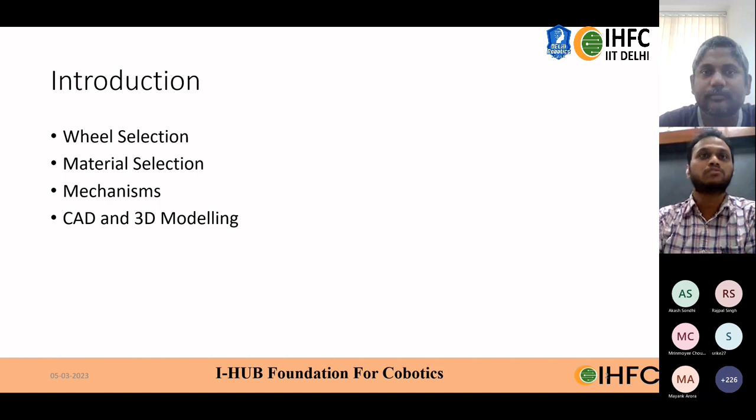Some of you students who have already gone through the taster courses in robotics and automation have some brief idea, and others also I hope have some basic idea. We'll just be elaborating on this.

Coming to wheels, these are the most important parts of your robot. As you know from the video Dr. Venkat shared, you see the bots moving around, and this is where most of your robot control comes into play - how it moves, how you stop the robot, and how you move it to your desired place.

So we'll see some different types of wheels commonly used in robotics - four different types. The first one, on the left hand side, is a standard wheel. This moves in a fixed direction, and you can connect this to your motors - it only moves in a single direction of the motor which you are driving the robot.

The second one is a caster wheel. Again, this cannot be driven - you cannot fix this to your motor, but it's just a support. If you've observed some swivel chairs, you have these kind of wheels which rotate in any direction. So this is just a support wheel to orient your robot.

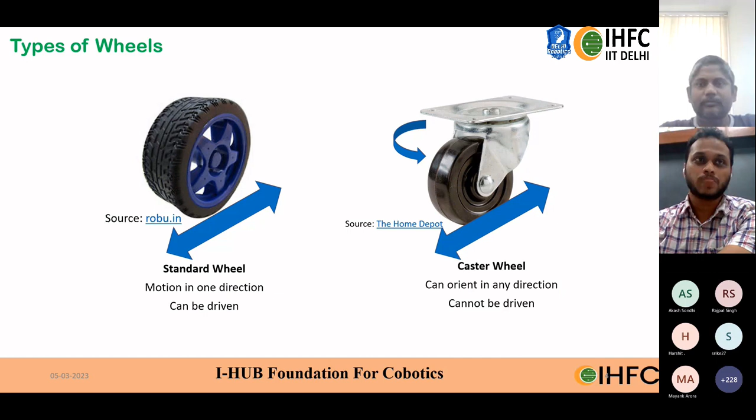Next, we have multi-directional wheels you can use in your robot. On the left, this is an omni wheel - it has a primary direction of motion, and perpendicular rollers attached to these wheels, meaning it can support motion in both directions. You can use multiple omni wheels to move your robot around without needing steering. Similar to omni, we have a mecanum wheel where these rollers are oriented in different directions - again multi-directional rollers - and you can use these wheels to move your robot around smoothly.

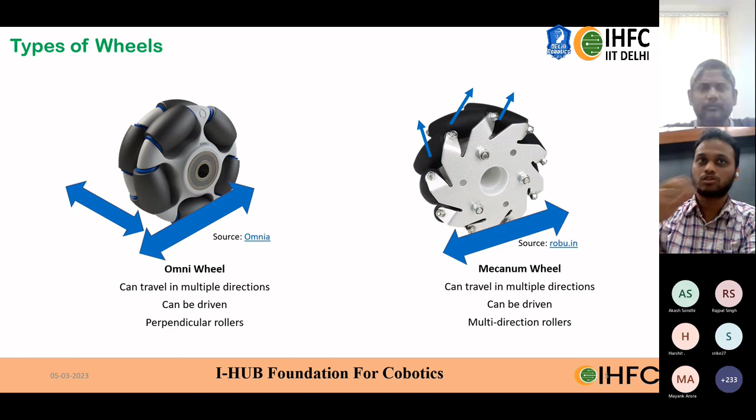I'll just show some videos of how these work. This is the first one - on the left hand side, you can see it has two standard wheels and a caster attached. Just by varying the speeds of the wheels in these two motors, you can rotate your robot anywhere. Whereas in this case, with omni wheels, it can move in any direction based on the input to your motors. All three wheels here are driven. So in the form as well, you have this drivetrain option where you can choose how many wheels you have and how many of them are powered - that you'll have to explain.

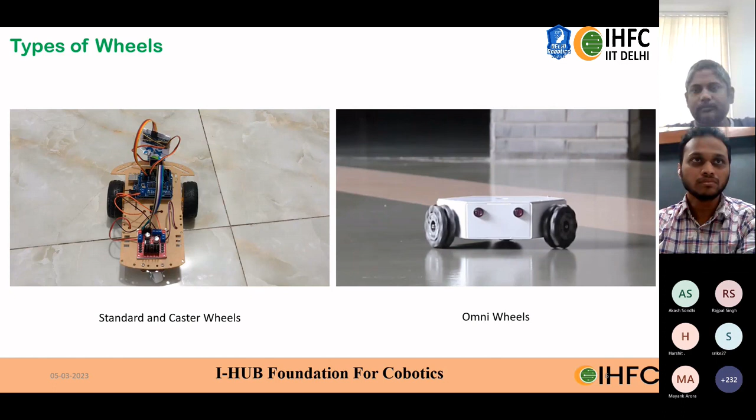Coming to the next slide, this is again a video of a mecanum wheel similar to omni wheel, but this is more smooth. You can see this is driven on all four wheels, and it can rotate and turn in any direction based on the input of your motors.

So this was about different wheels that you can use to build your robot, and on that you and your teammates along...

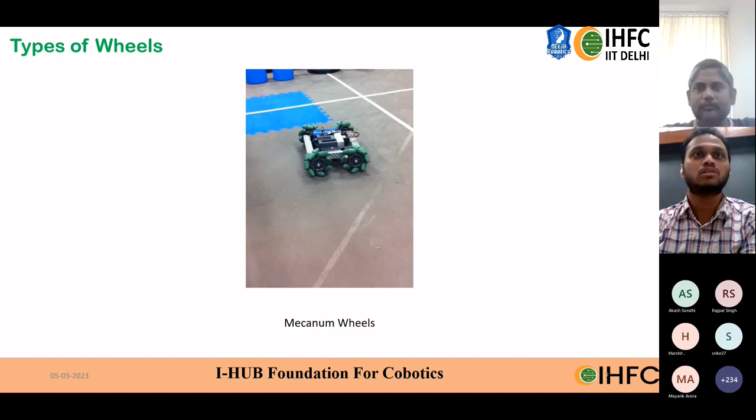You and your teammates, along with your mentor, can decide on different wheels that can be used.

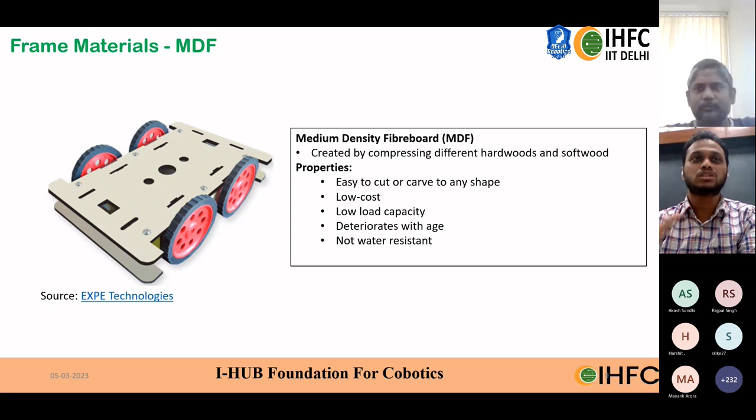Coming to the second topic, there are different materials, and this is also important on how you build your robots and what kind of materials you're planning to use. The first is basic MDF board. You must have seen this for basic robots, like when you're planning to build initial prototypes. It's simple and cheap, and you can easily laser cut these parts based on your requirement and test out your prototypes. This material is recommended for initial prototyping when you're in the testing phase of your robot concepts, to determine the form, shape, and size of your robot.

Next is acrylic, which can also be used for prototyping robots. Compared to MDF, it has a bit higher load carrying capacity, and it's water resistant and more durable than MDF.

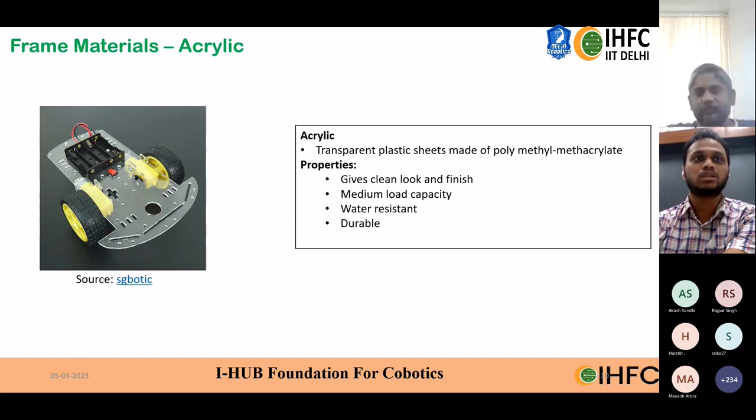Coming to the main materials, we have metals, which are heavy duty. These are used for bots which are outdoors, and for competitions where there are a lot of contacts and impacts on the robot. Aluminium is a common material used to build robots. It's very lightweight and durable, but slightly expensive. You can get these frames ready-made outside, or make custom sizes for your robots.

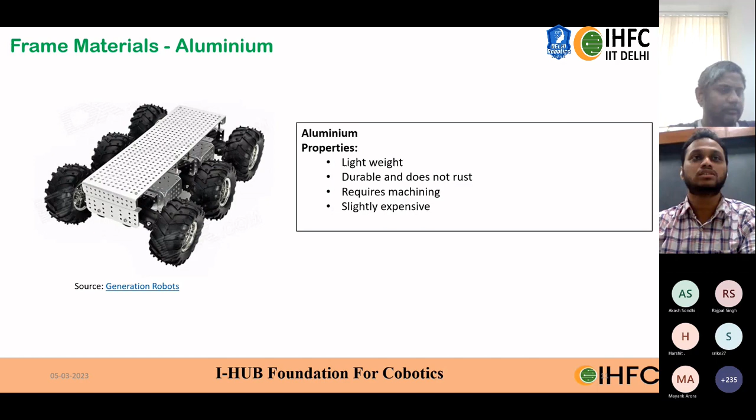Next is steel, which is slightly cheaper than aluminium and has better strength, but the main issue is that it's very difficult to machine. You'll need high-end machinery to cut these parts and join them to build your bots. So you'll have to keep in mind what kind of material you're choosing for your robot during the initial stages of your design.

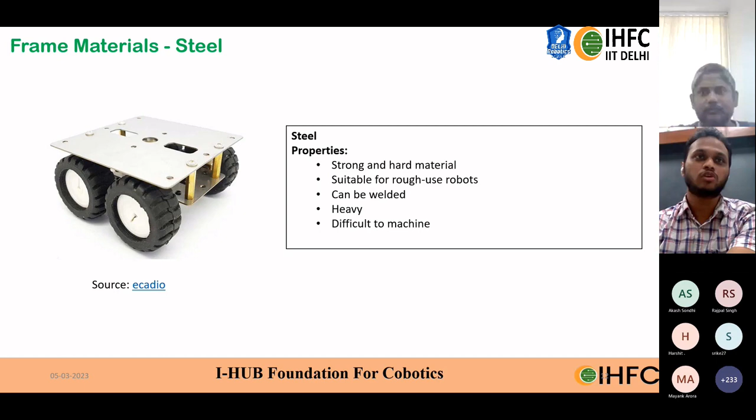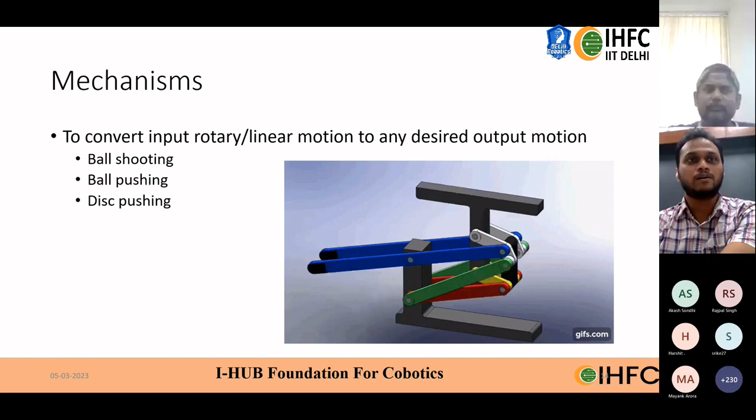You have three different tasks if you see in the video as well as the rule book: ball shooting, ball pushing, and pushing the discs. For these three tasks, you'll either use your whole robot as an individual body to perform these operations, or you can use different mechanisms.

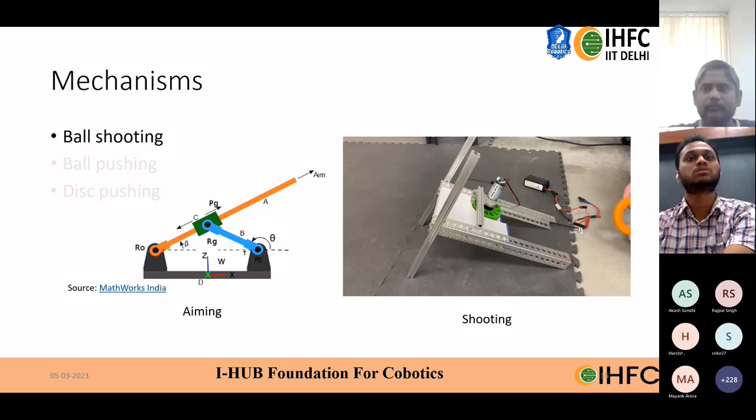For example, for ball shooting, I can show you a mechanism to aim your ball, where you can adjust the direction you want the ball to fly. This is an example mechanism where you can use different parts to build this. Here's a sample video of shooting, with a rolling disc shooting to one particular target. This is just an example I'm sharing with you guys, I'm sure you have better ideas and different concepts you're currently working on to realize this.

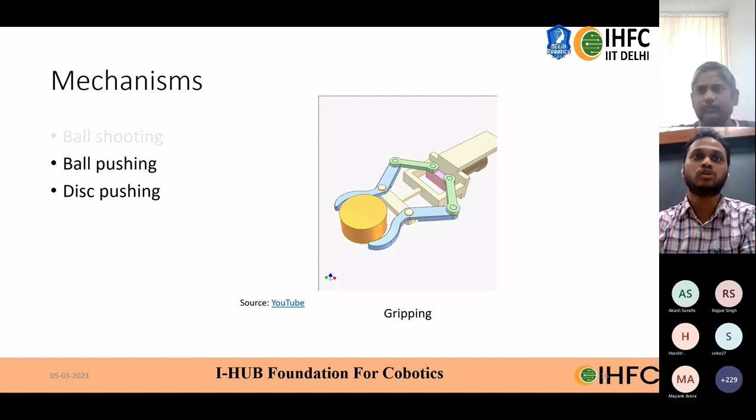Then there's ball pushing and disc pushing, which the robot can do with the body itself. Here, if you want to try a mechanism, there's a sample mechanism gripping the disc or the ball. You can incorporate these kinds of mechanisms in your robot for better control over the discs or ball, and then move the whole bot to your target area.

Coming to transmission, all of you have seen gears. Gears are used for motion and power transmission, and most of you are using electric motors, which have a fixed speed and torque. To modify that based on your requirement, you can use gears or gear trains. A set of gears is called a gear train, and when two gears mesh, that's called meshing. There are different terminologies for a gear.

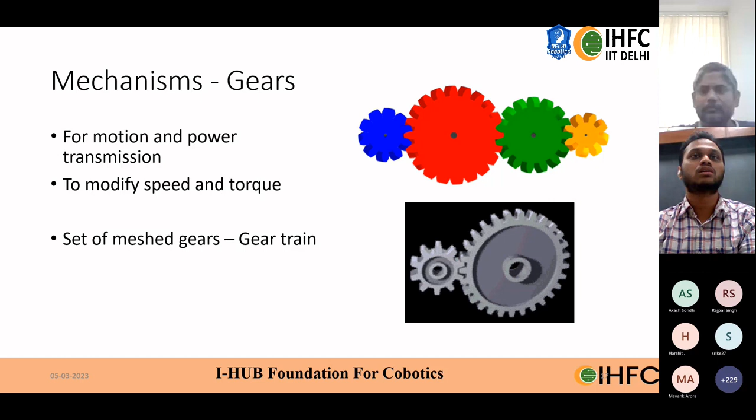One of the most important terms is called a module. A module is basically the diameter of the gear divided by the number of teeth on the gear. If you want to mesh two gears, you have to make sure the module is the same.

For example, two gears have the same module, like 1.5 or 2. So these are the things you have to keep in mind while choosing a gear for your system, while designing this gear for your system.

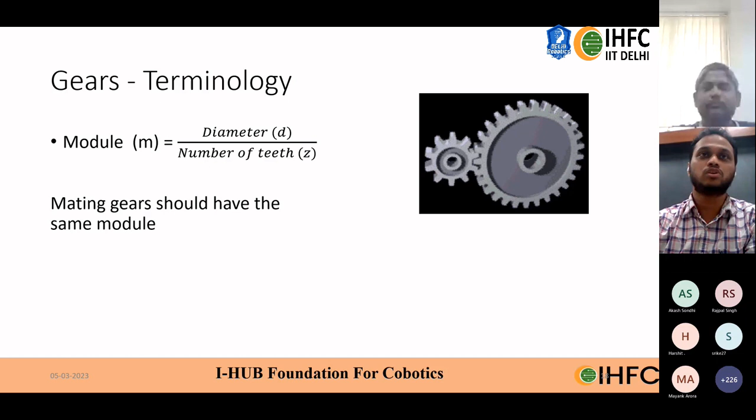Next thing is gear ratio. You're converting the speed of the motor. Suppose a motor has some 1000 RPM and you want to convert it to a different RPM. RPM, I hope all of you know, is revolutions per minute. That is how the speed of a motor is measured.

So gear ratio is basically the number of teeth in the output gear by input gear. We have this standard law here where T2 by T1, the number of teeth, is equal to N1 by N2, the speed in RPM, which is also equal to tau 2 by tau 1, the torque required. Again, I'm not going deep into the concepts of torque or force, since I hope you already know by now.

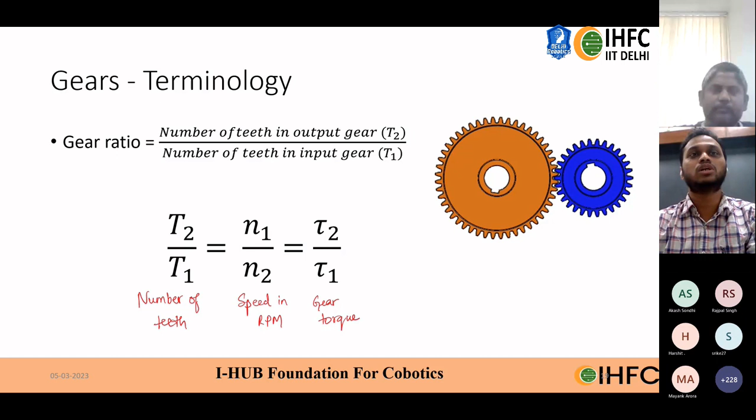You need to measure the required torque that the motor has to provide to your system, and based on that you can select these gears as well.

There's an in-house built tool from IIT Delhi called Mechanalyzer, where you can explore different mechanisms which you can try out and play around with. This is free software you can download from mechanalyzer.com. It will help you get some idea as to what kind of mechanisms you can incorporate in your systems.

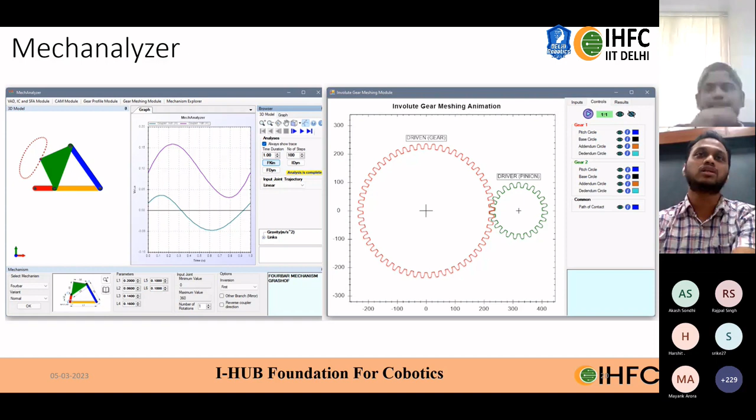Also, there's a gear meshing tool where you can select different gears which you can use in your system, in your robot.

So, final part, we'll see about CAD and 3D modeling. Some of the entries you've seen have already used CAD 3D modeling, however some have used simple sketching. So we recommend that you use these professional tools which are available.

There are a few 3D modeling software which are free. For example, Tinkercad, many of you have already used. This is a basic tool where you can model your bots, 3D modeling.

There's also Autodesk Inventor. If you have a student ID, on the Autodesk website you can search for your school name. For example, SOSE schools have already been listed in Autodesk, or you can contact your IT coordinator in your school to get your school listed. You can download this student version of Autodesk Inventor and build your models there.

There's also one more tool called Creo, which also has a free student version. Then there's SolidWorks, but this is a licensed software, so if your school has a license for it, you can make use of it. There's also rendering software where you can build your model and simulate it in some environment, called Blender.

We'll go through two or three of these. Tinkercad is very simple and easy to use, a basic minimalistic software. It's an online tool, you don't have to download it, and you can build your models here.

You can also do your initial prototyping, for example 3D printing, or use these files to laser cut on an MDF or acrylic sheet. But the limitation here is it can only create 3D models. For example, if you're working on metals, you'll need 2D drawings in order to manufacture or machine those parts, which cannot be done in Tinkercad — it can only create 3D models for representation.

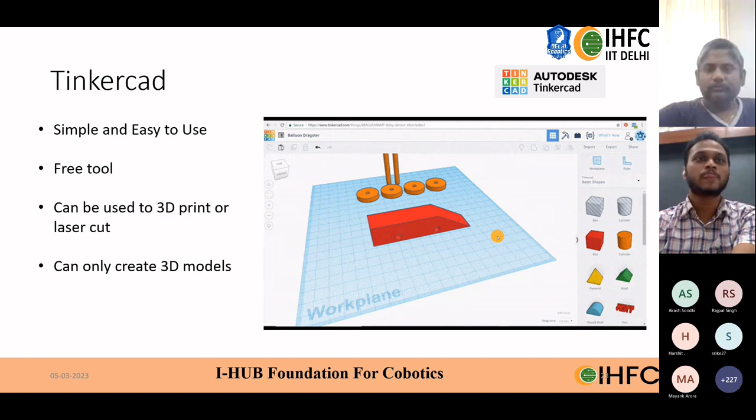This, however, is a professional tool, Autodesk Inventor, which thankfully has a student version where you can build different mechanisms, even your whole robot. You can move the parts around and see how they interact with each other, and animate the motion. Moreover, this can also create 2D drawings which you can use to build these parts if you're using metal. So that was the tools.

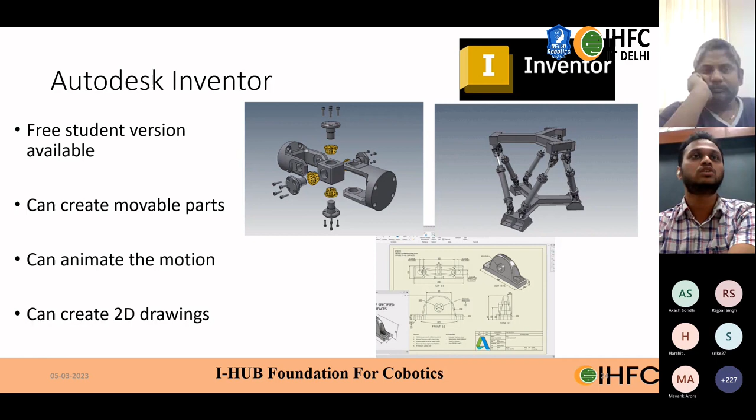There are also other software like Creo, which also has a free student version, and SolidWorks, as I said, which is licensed. And again Blender, which you can use for 3D modeling as well as for rendering your robots.

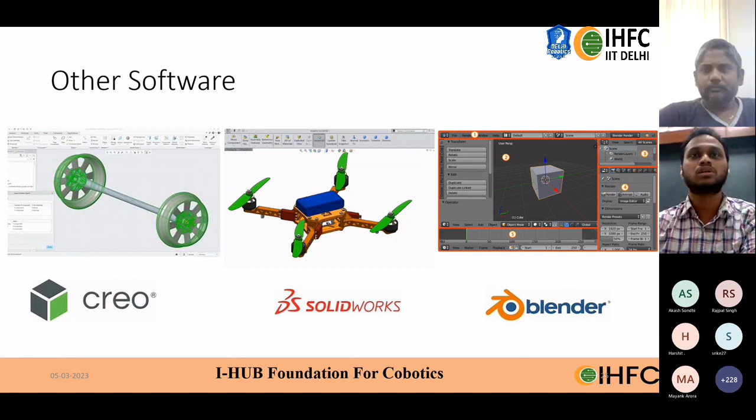So this was the overview of mechanical concepts. If you have any questions, you can put them in the Q&A section, and we'll be answering them at the end of this session. Thank you.

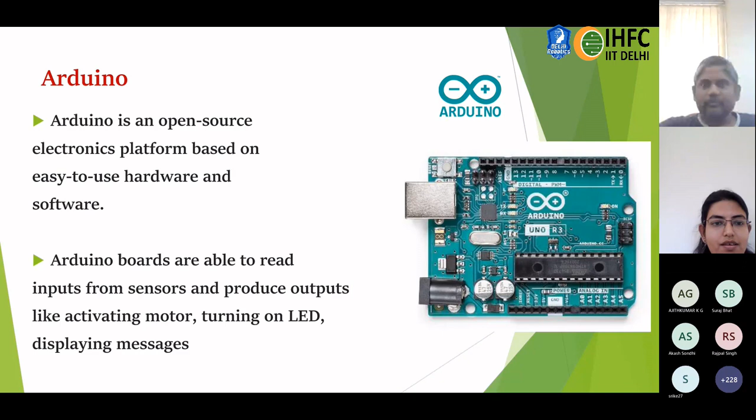Now it is composed of two things. One is the hardware, that is our Arduino board, which has the microcontroller, analog pins, and DC jack - this is my Arduino board, which you can see on the screen. And coming to the software part, we have Arduino IDE, the Arduino Integrated Development Environment, which is the piece of software that runs on our computer. So there are two things again, hardware and software.

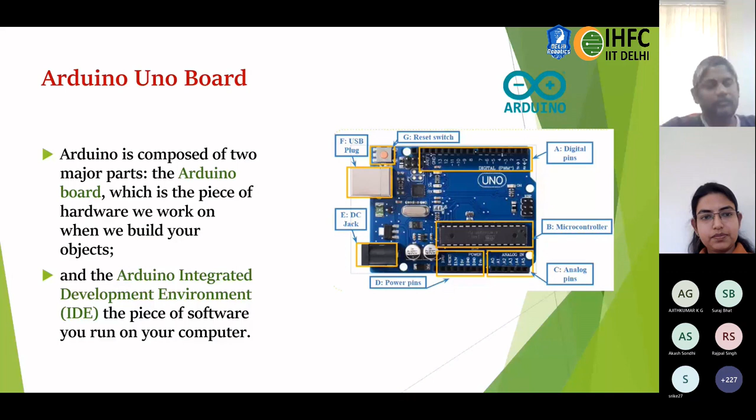It is freely available - the software can be downloaded from the Arduino web page itself. You have the Windows and Linux versions for it, so you can download it and go through this. The hardware board needs to be purchased from outside, but the software is available for free.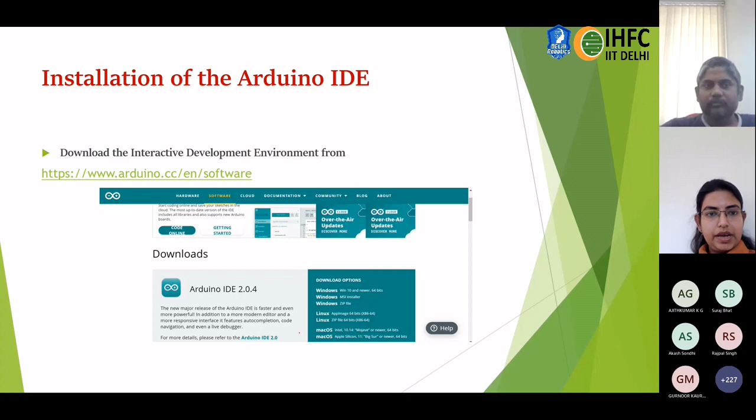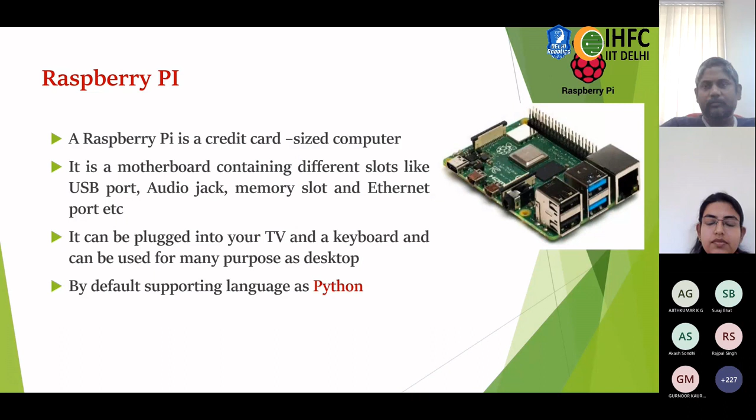Now the default language which the Raspberry Pi uses is Python, and Python can also be downloaded - it's free software which is available, so you can download it and work on Raspberry Pi.

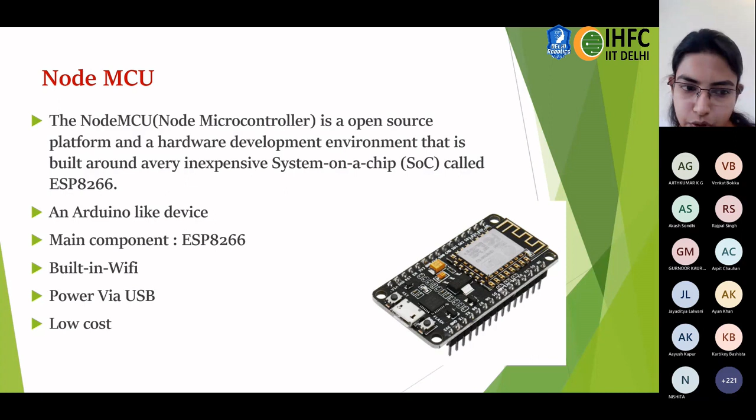If you go on this web page, you can install the ESP8266 add-on Arduino feature, download it, and work on its progress. The main advantage of this is you have inbuilt Wi-Fi, so you can use it on different applications to control them.

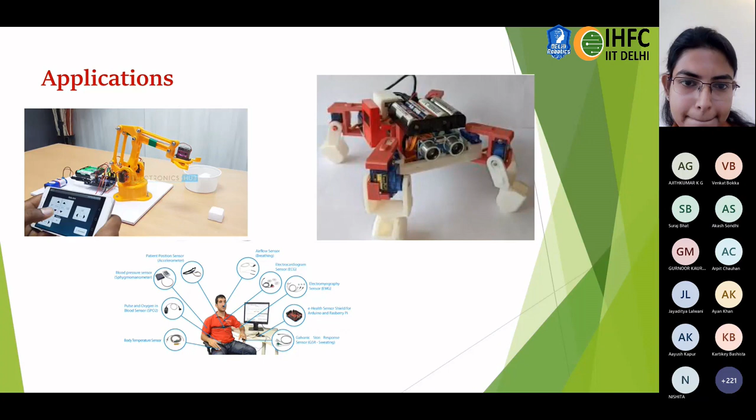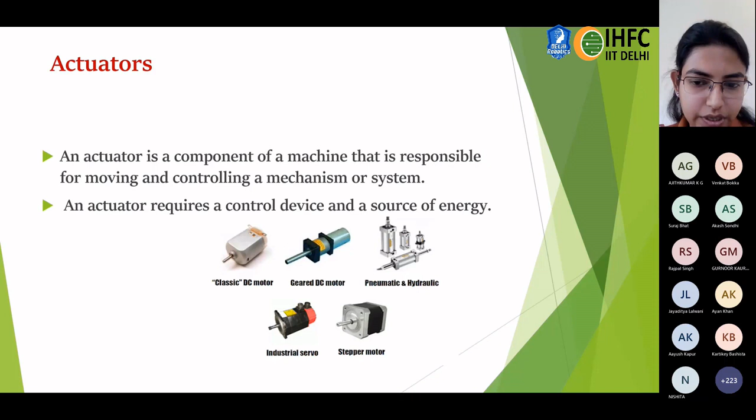Now the next thing is actuators. So what is an actuator? An actuator is a component of a machine that is responsible for moving and controlling a mechanism or a system. Everybody is aware, I feel, of what an actuator is - you have studied till now that we can use DC motor, servo motor, and stepper motor as electrical actuators. Now we also have pneumatic and hydraulic actuators.

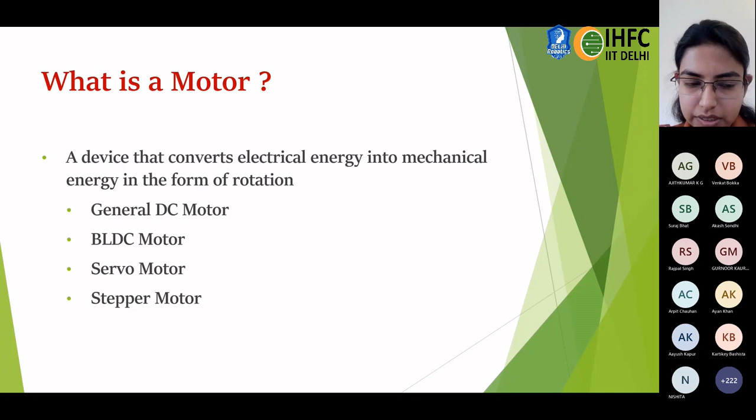So what is a motor? A motor is a device that converts electrical energy into different forms of rotational energy. So we have DC motor, brushless DC motor, servo motor, and stepper motor.

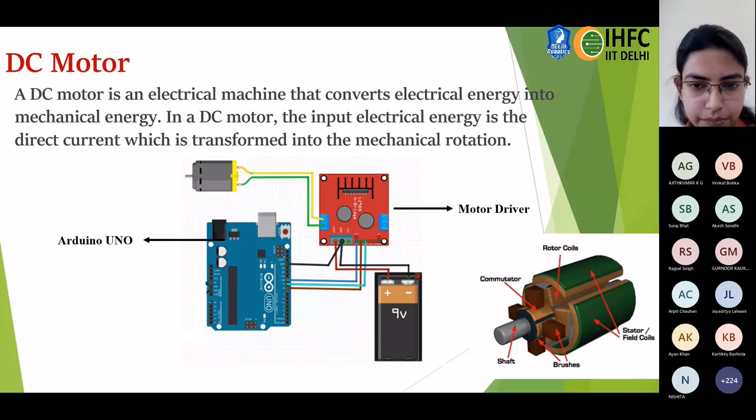Coming to the brushless motor, that means brushless DC motor, we don't have any brushes present in it, and it can be very useful in your robotics applications. You have studied it in detail, or if you have any queries, you can ask us. I'm not going in detail of that.

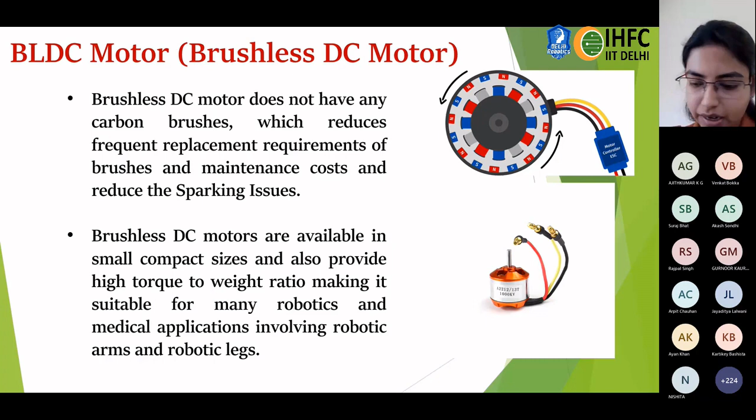So again, we have servo motor. Servo motor can be used to turn in any action like 180 degree or 360 degree. You have different degrees of rotation that can be used for the purpose of the servo motor.

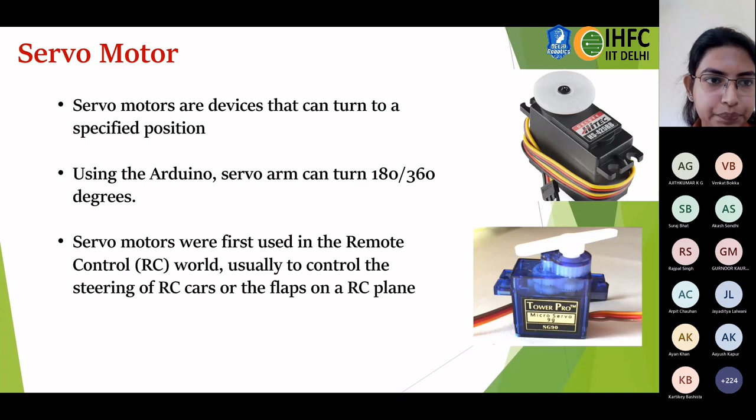Next, coming to stepper motor, it can be used in different applications like robotic arms, CNC machines, camera lenses. The stepper motor is also a brushless DC electric motor that divides the rotation into steps. So wherever we need steps of rotation, we can use the stepper motor. It converts each pulse of electricity into one step. So this is a stepper motor.

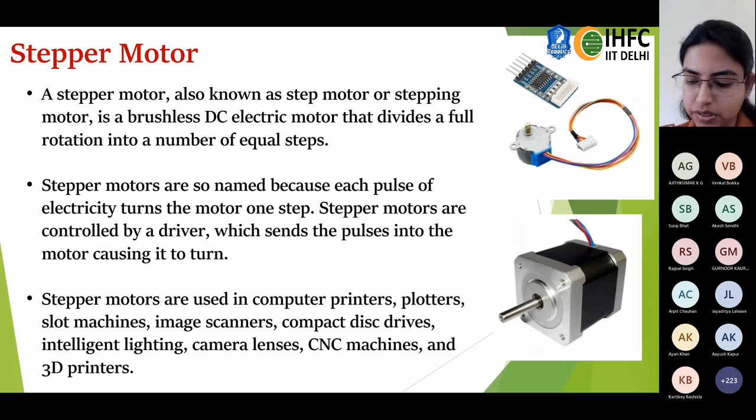Now next is our sensors. We all are aware of sensors. What are sensors? A sensor is a device which responds to whatever input we get from the physical environment, and according to this, the sensor acts.

So the input can be light, heat, motion, pressure, and other environmental phenomena. We have the IR sensor, ultrasonic sensor, LM35 temperature sensor, PIR sensor, smoke sensor. Different types of sensors are used, and based on our application, we can use different types.

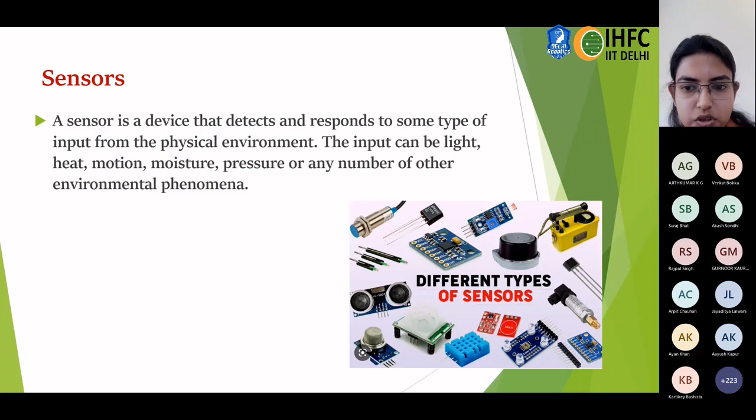So here I'm telling about a few of them, like the infrared sensor. What is the infrared sensor? It is an electronic device that emits light in order to sense objects in the surroundings. There is an emitter and a receiver. It emits light, detects the object, and receives it back. It can be used in different applications like sorting devices, object detection, and various robotic applications.

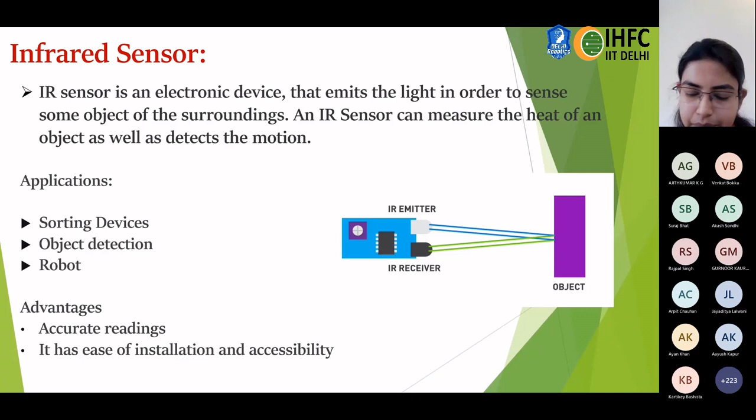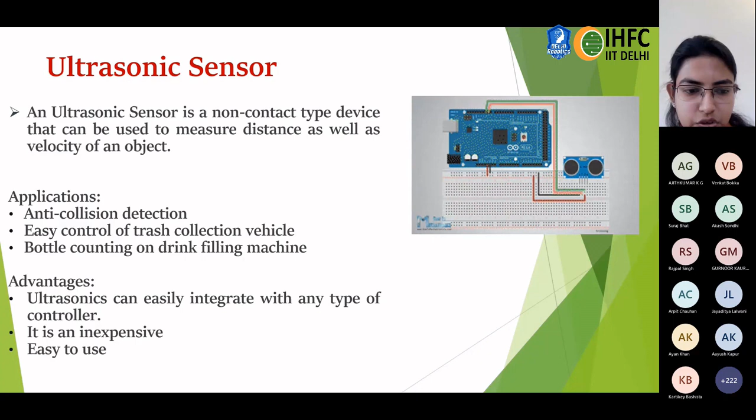Coming to the ultrasonic sensor, it can also be used to measure the distance and velocity of an object. For example, to detect where an object is lying, we can use this ultrasonic sensor. It can be used in various applications like anti-collision detection and easy-to-control vehicles. For example, if the vehicle or robot is moving in any direction, it can easily detect that there is some edge or obstacle. The advantage is that it is very easy to use, inexpensive, and easily available.

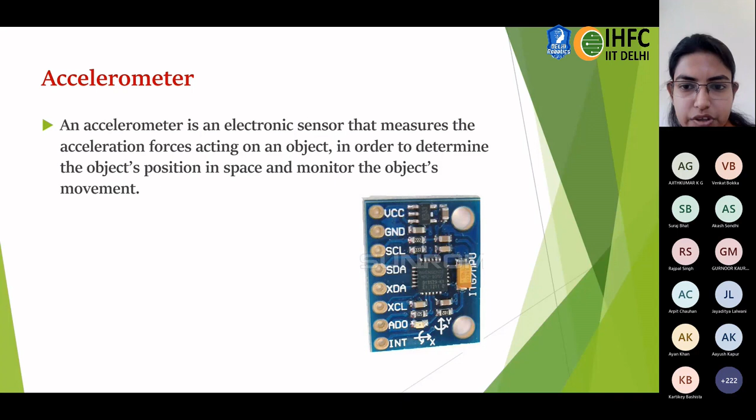Now, accelerometer can also be used as a sensor for moving rotation. For this purpose, we can use the accelerometer. It is also readily available, and it is another type of electronic sensor which we can use in different robotic applications.

So in order to design, we can use Tinkercad as a free software where we can use the Tinker platform for circuit design.

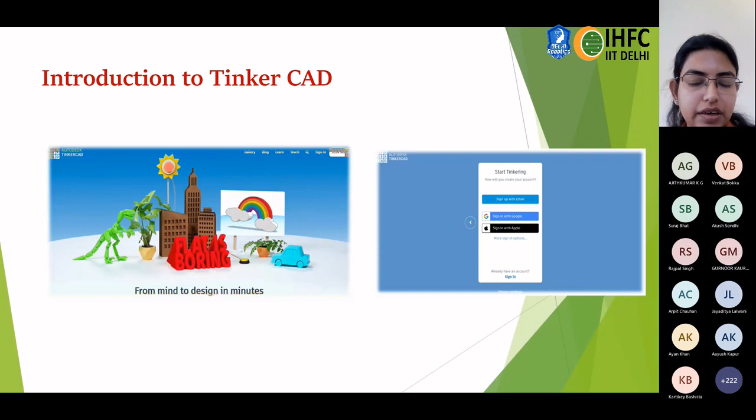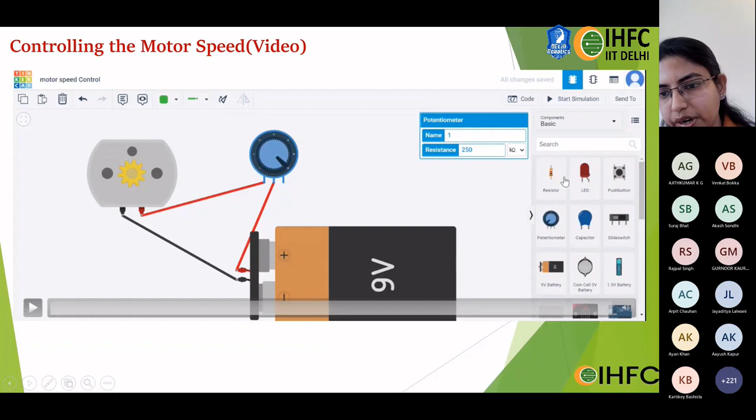So Tinkercad is a freely available online software which you can use for different circuit connections as well. We can see the different components available in the component list. You can take it and use it.

You can write the code here itself and you can see the applications of that.